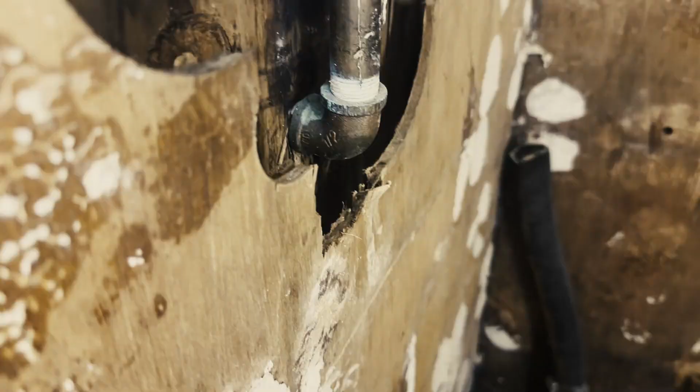I was doing some sanding and some prep for reinstalling stuff in the engine room, and I want to move on to some of the aft walls. And I discovered that this aft wall is a false wall. It might actually have two false walls.

So I'm going to peel off the first one because then we'd have access to our plumbing a little bit better. It looks like there might be some rot behind there, and I don't want to put it all back together with the rot there. But this was off the factory. This 1/4 inch thick false wall was in there from factory. So it's going to be interesting to see what's behind it.

And if this other wall is also false, then we'll probably take it out too, just because there's not really a point of having a false wall here, especially now that the plumbing is definitely something I want access to, and I don't want leaks happening that I don't see, so might as well do it right.

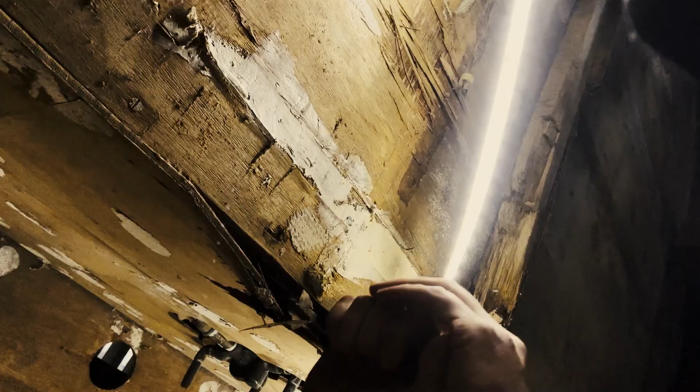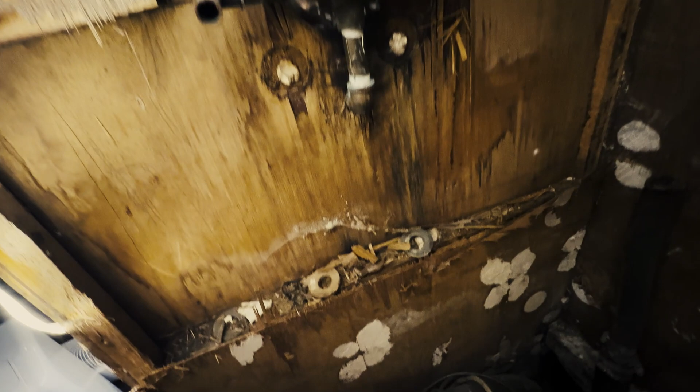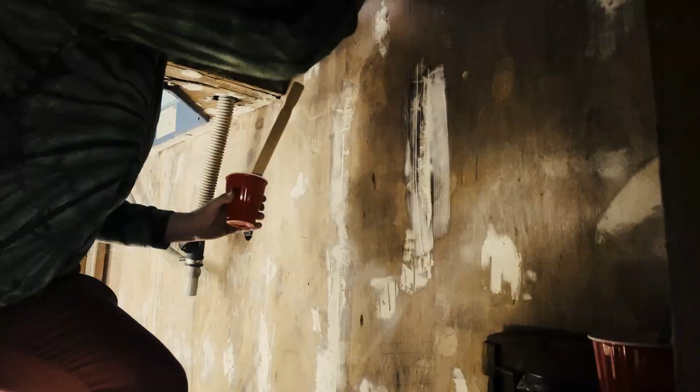Got another pot of epoxy to mix in there, and today I want to 3D scan the engine room. I don't need anything super accurate, but I want to make a plan for where everything's going to go, and instead of painstakingly measuring everything, I could just scan it with my phone, so I'm going to do that. All right, now that the epoxy is coated, I'm going to use a program called Polycam and just get a loose LiDAR 3D scan of this room.

It's not the most accurate thing on earth, but it gets it down to roughly an inch, half an inch kind of range. I'm usually pretty dead on with stuff. I wouldn't go cutting my pieces off of this sketch, but it would at least give me an idea whether or not my components are going to fit.

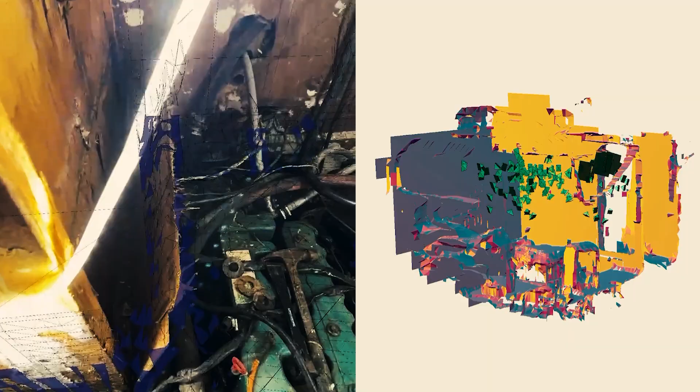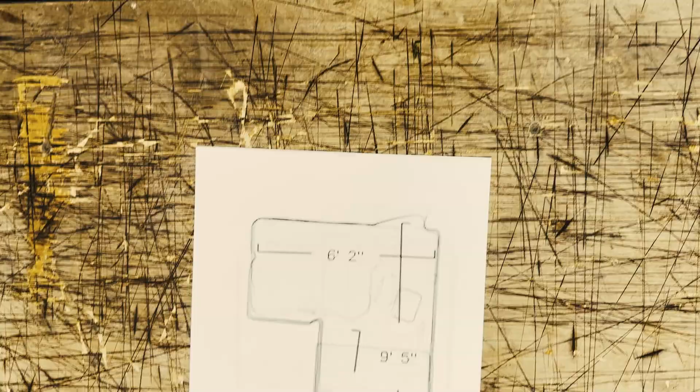All right. I was pulling up the scans in Fusion 360, and because I'm not very good at that program yet, it just doesn't really translate well to YouTube. So instead, I went back to the Polycam app and loaded up blueprints. So I got this one right away, and then just turned the project on its side for each side. So let's talk about the aft wall.

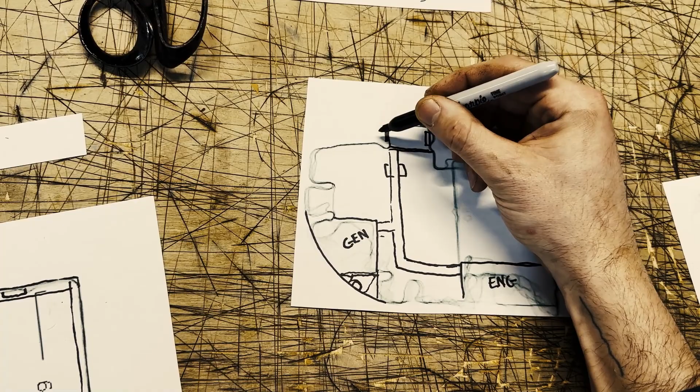As you can see, we have an air vent for our engine box, our generator box, the shower, and the entire engine room. Each of these can be independently controlled, and then we have a forced air fan that exhausts it just outside of the cockpit right here. Now that leaves this real estate for our coolant loop.

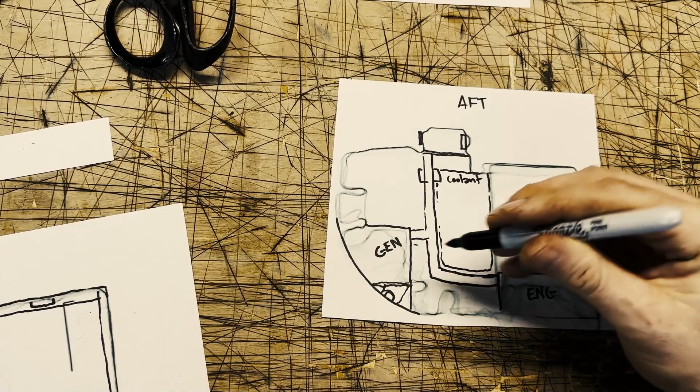And that's going to be a bit of a tight spot because we have a heater, a generator, an electric water heater, an engine, and we're going to have a heat exchanger all in this space with valves that allow us to run the coolant from one system into all the other systems or isolate each separate system.

So that's a lot of valving, and that's going to be tricky to ensure that it's clearly labeled and clearly obvious to whoever comes in after me which systems need what valves and can be shut off in what ways. So yeah, not exactly super simple. We're also going to have a hot water on demand system.

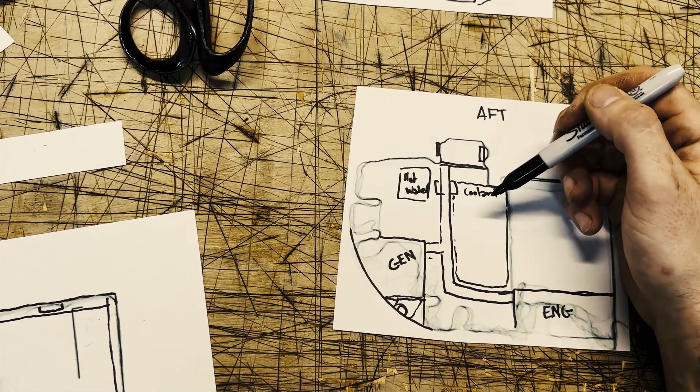And the reason we want to put it here is it's right next to the shower on the other side of this wall, and it's right next to the galley, kind of equidistant between the two. It's less than 4 feet away from both of those systems. So that lets us not waste propane and not waste water before we have hot water ready to go.

We're also going to feed that off of a heat exchanger so that if there's residual heat in the system, the water can be preheated by the engine, generator, all that stuff through a heat exchanger, and then it reaches our instant hot water heater and gets warmed up that last bit.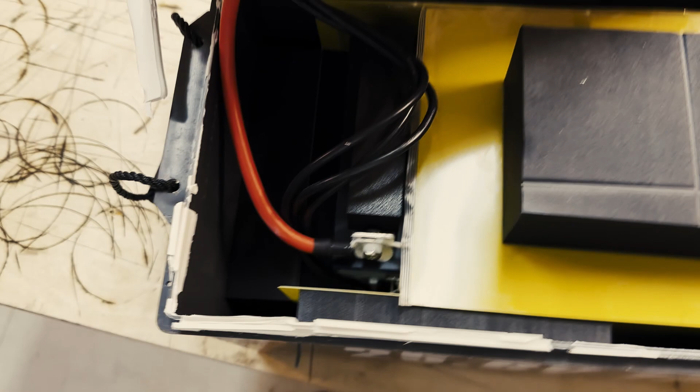All right, here we go. We've got, what is that? 6 gauge, and then you've got three 10 gauge wires for the grounds. Interestingly, there's foam on all the corners except for this side. So if you've got one of these, make sure you don't bang it too hard on the side opposite to the terminals. Oof.

Do you want to bet it's a fried BMS, or do you want to bet it's a fried cell? I think BMS, just because of the voltage, just because as you deplete the battery, it completely disconnects. If it's in series and the system starts powering on again, it's going to want to jump straight up to 40 volts. And if it's a 25 volt pack and then it hits 40 volts, I think that's what's frying it. I think it's just not ready for that.

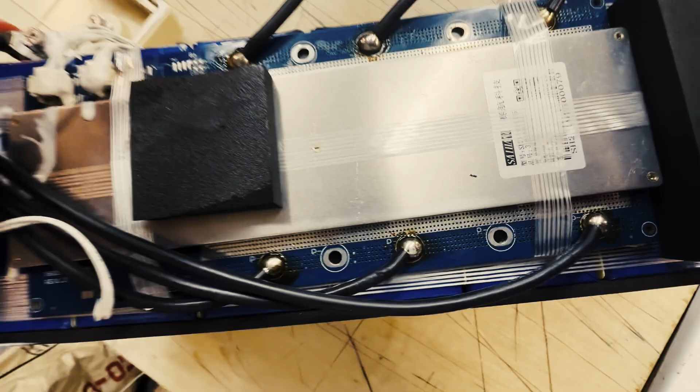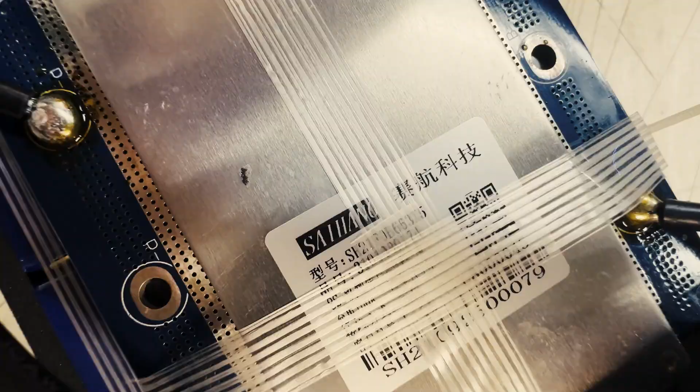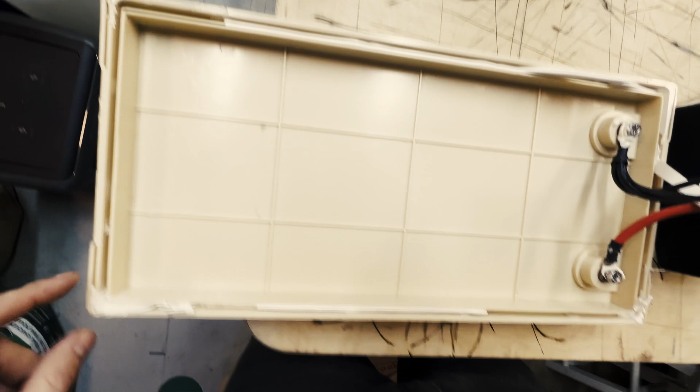I mean, that's just probably leftover solder. And these are, oh, there's some heat there. So the tape's melted. And that looks like there's some scorching. First of all, this is the sealant they're using to waterproof it. Feels like a very cheap silicone. It's not very sticky at all. And there were sections where it wasn't totally covering everything. So I don't know. Maybe it would have held up. Maybe it wouldn't have.

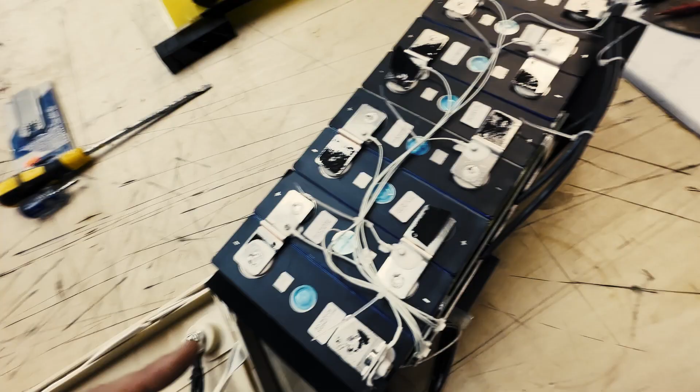These are our terminals. Don't love that they've gone for the 10 gauge wire here in 3 separate pieces instead of one big 6 gauge. But that's not where it failed. The BMS actually failed, and I'm not sure if it failed because it failed to balance these cells, because these 4 are reading 2.78, this one's reading 3, and then these are like 2.82. Like the range is pretty big here.

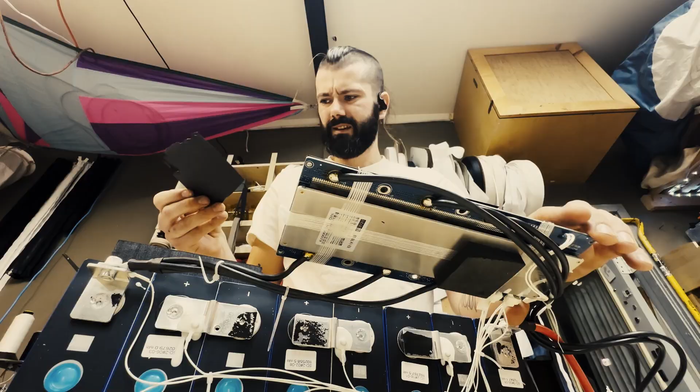It's not great. All right, so there's some heat shielding on the back side of this BMS module. That's quite melted. And you can see, oh wow, look at that. Check this out. This has completely just melted and lit up this one circuit where it obviously had a ground fault of some sort and just superheated itself.

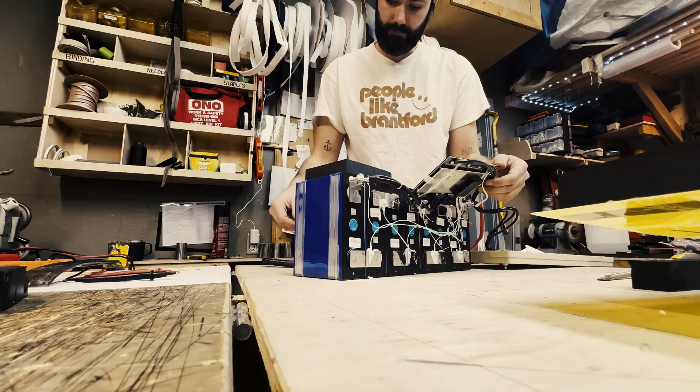I'm not really a review channel. I'm kind of too poor to be dissecting nice batteries when they're sent out. Maybe if my channel does better, I'll take a hacksaw to more things like this. But generally speaking, you could certainly say that I am biased a little bit. These companies want to send me a product that I need for my project. Of course, I'm going to be a little bit biased into wanting it to be good and to work and be excited about it. I always try to stipulate all of my compliments with, well, I think this fits for this particular application and not for that one. And I don't just say it's always perfect, but here we go.

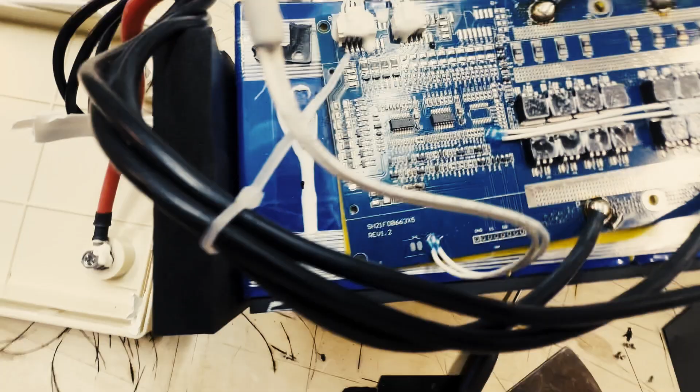Get the heat sink off of this thing and it can show us what melted. There it is. So with the heat sink off, you can see that this and these two, are these resistors next to it? I'm not an electrical engineer, but those are definitely fried. And the circuit that feeds it has been superheated. It actually cooked off some of the heat shielding on the back. You can see it's like imprinted into it and melted that.

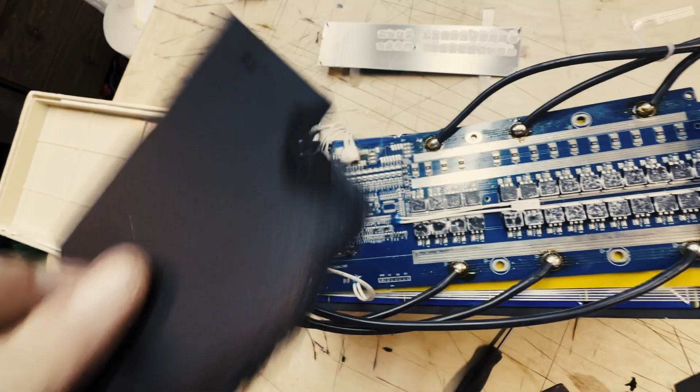So that's toast. And that is probably because it was getting 40 volts when it first fired up, because the other battery hadn't turned on the circuit, and that's what fried it. That little tiny microchip that they put in there is just not compatible with those higher voltages, which means this BMS is not compatible with being run in series. Yeah, so probably going to order another BMS. Maybe I might chop into this battery and actually wire them both together with a 48 volt BMS. I don't know. If you guys got any ideas, leave them in the comments.